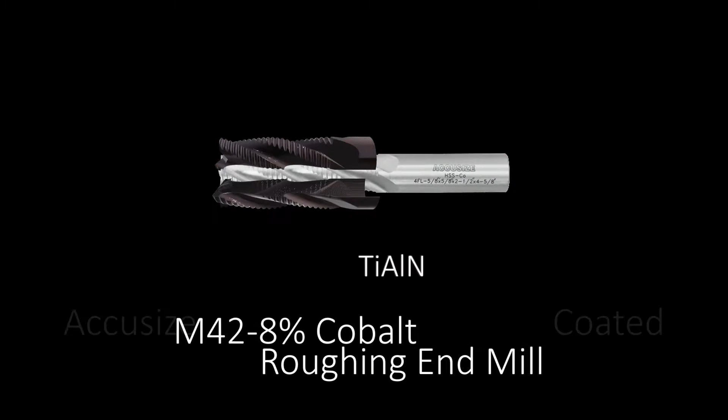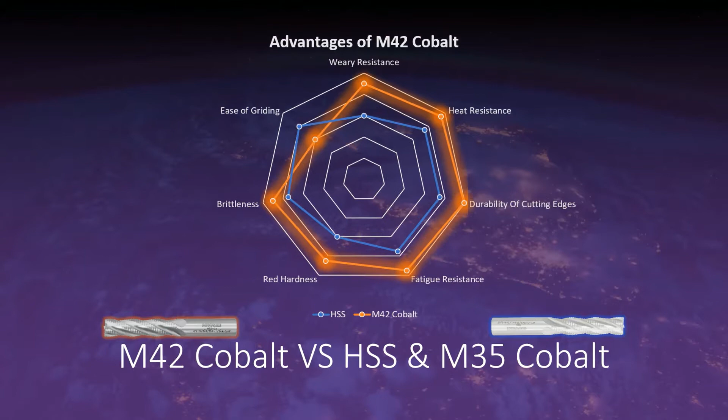These end mills have outstanding performance on milling tough metals because they are made of M42 cobalt with TiAlN coating, which is the titanium aluminum nitride coating. Compared to high-speed steel and M35 cobalt, M42 cobalt provides the cutters with better wear resistance, heat resistance, cutting-edge durability, and fatigue resistance.

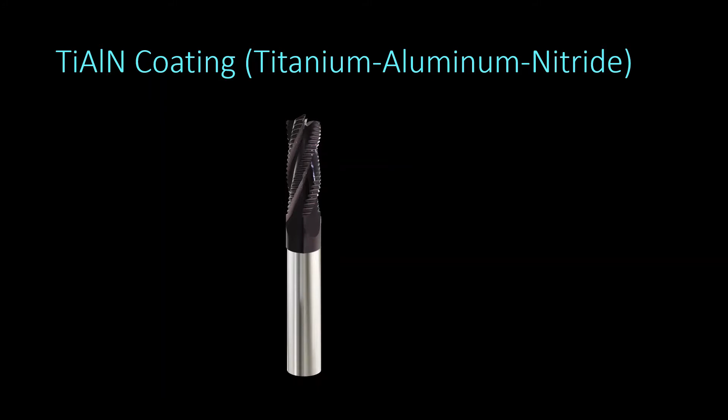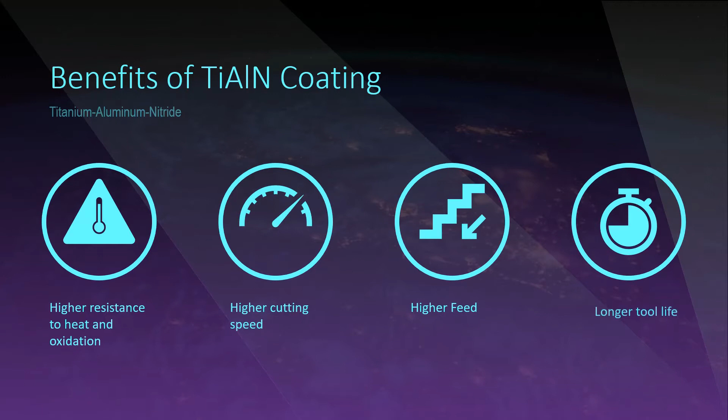As a result, tools made of M42 cobalt have longer tool life. Furthermore, the TiAlN coating provides higher resistance to heat and oxidation, so using M42 cobalt roughing end mills with TiAlN coating requires significantly less cooling. Beyond that, the TiAlN layer enables the cutter to work with higher cutting speed, higher feed, and higher tool life, thus considerably improving the working process.

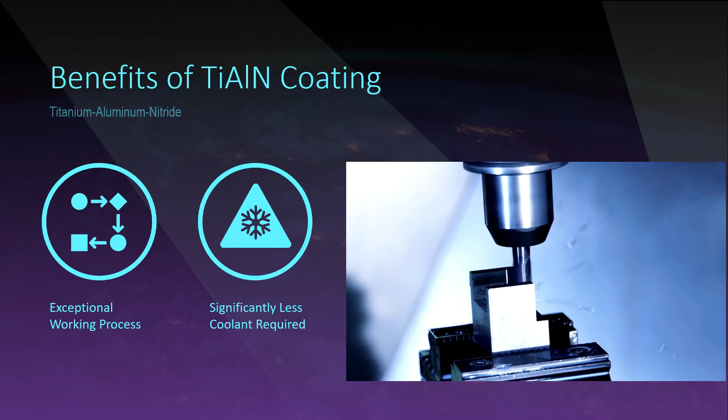With its multiple flute features like 4-flute and 5-flute, the end mills can help finish machining jobs from good to exceptional at an affordable cost. With M42 cobalt and the TiAlN coating, you can use the end mills to cut difficult and abrasive materials, ranging from medium to the highest hardness level machinable by high-speed steel.

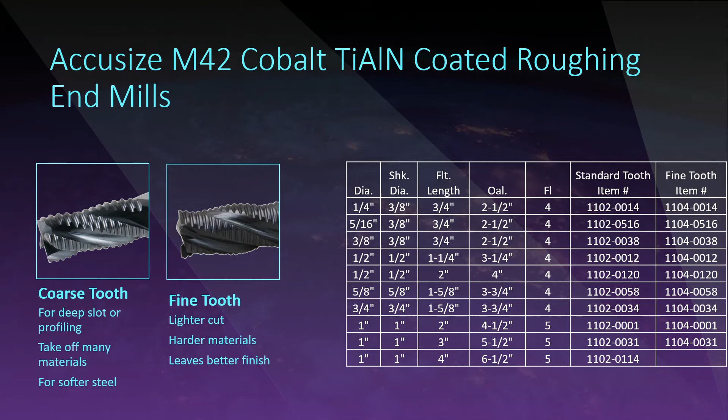You can source AccuSize M42 cobalt roughing TiAlN coated end mills of fine tooth or coarse tooth. The fine tooth rougher is better for lighter cuts and hard materials, and leaves a better finish to clean up with a standard end mill. In contrast, the coarse tooth is used for deep slots or profiling when you have to take off a lot of material, usually in softer steels. All AccuSize M42 cobalt TiAlN coated end mills are CNC machined.

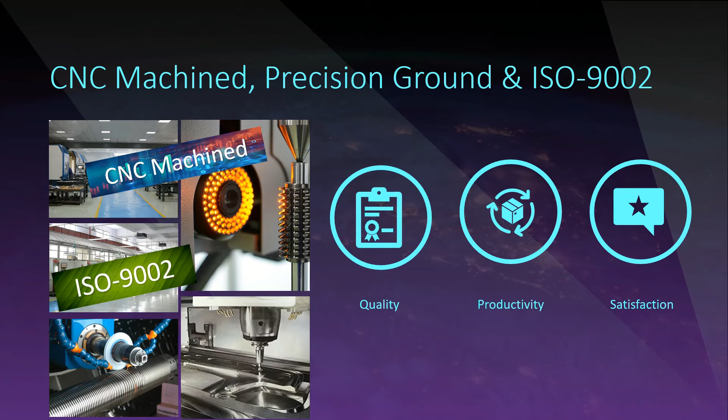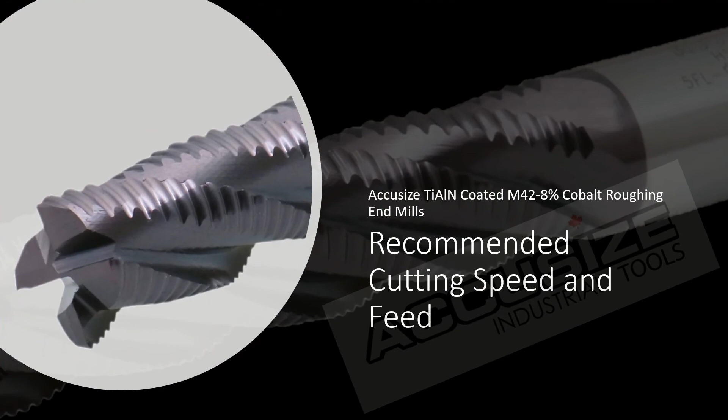The production factory achieved ISO 9002 quality management certification. Quality, productivity, and customer satisfaction are guaranteed. Additionally, we have support documents of recommended cutting speed and feed. You may find them in any listings of our M42 cobalt end mills with TiAlN coatings.

One more thing: please note M42 cobalt will also be more prone to breakage due to its relatively higher brittleness. The 4-flute and 5-flute end mills are not suitable for cutting soft materials like wood and aluminum.